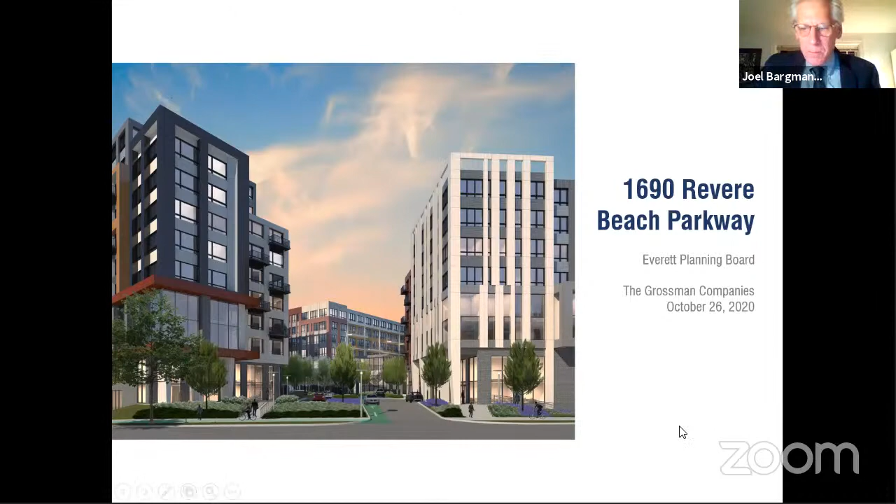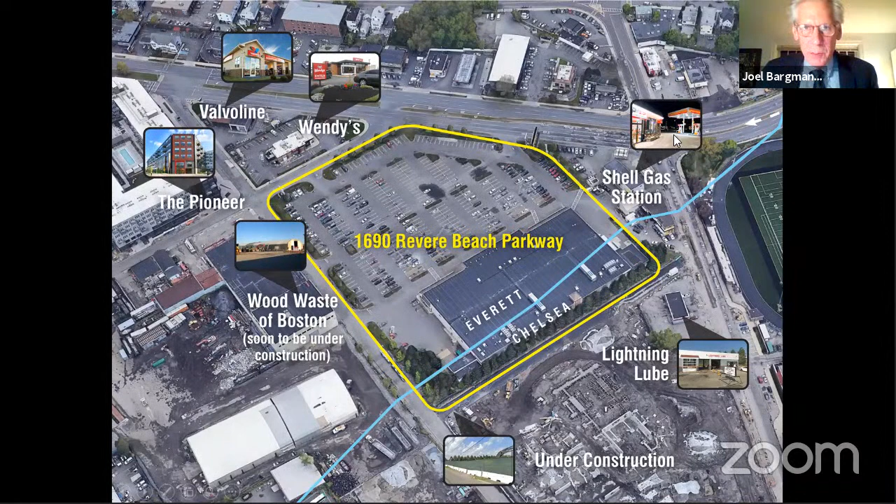As you recall, the site is the site of the Stop and Shop, bordered by the gas station on Everett and Revere Beach Parkway, Revere Beach Parkway on one side of the site, Boston Street, Vale Street, and then Locust is the street between this project, 1690, and the Fairfield project that's completing construction now to the south.

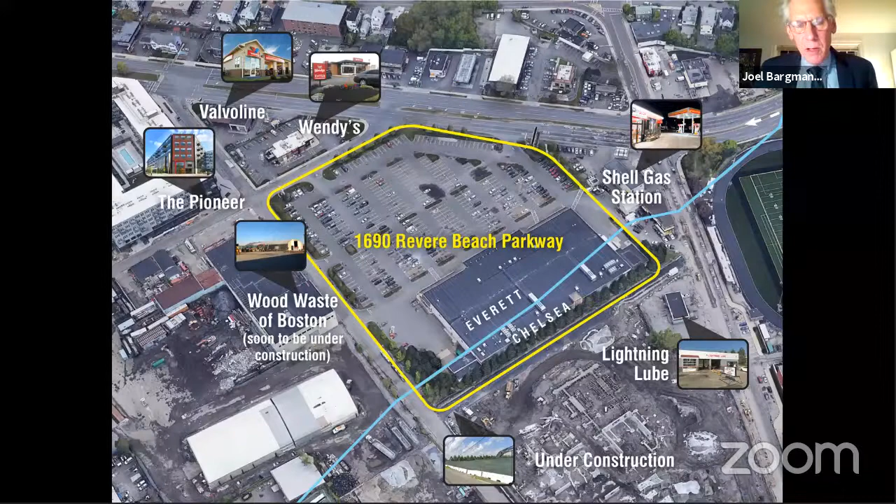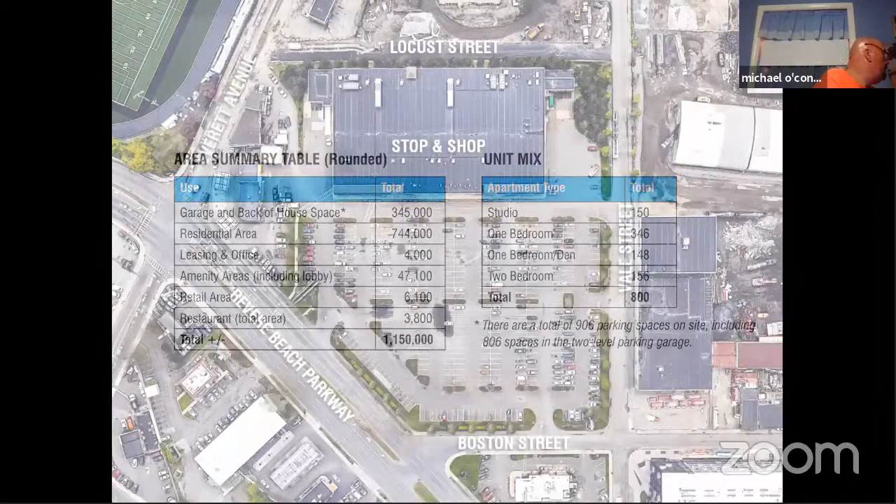As I mentioned, the statistics have not changed for the project. This is just a site plan to orient you with the plans that have been prepared. So Everett Avenue is on the left, Revere Beach Parkway is on the diagonal right-hand side.

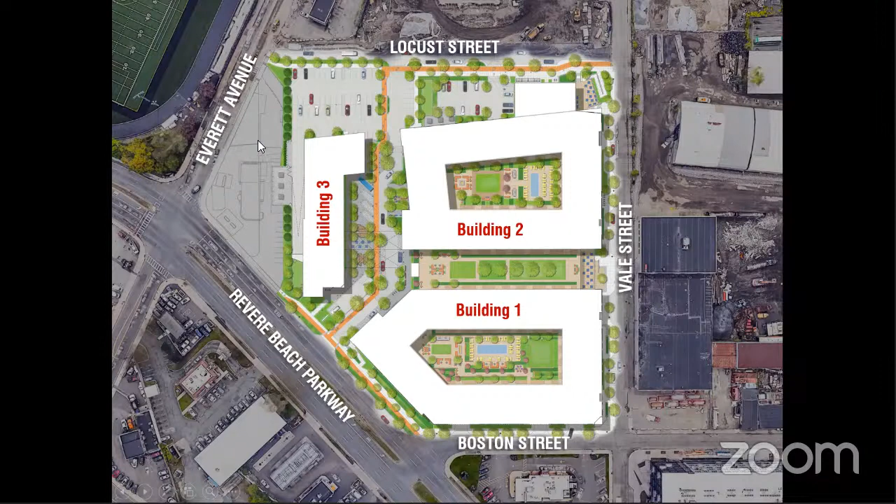And this is our site plan, which you had seen, with 3 buildings: building 1 on Revere Beach Parkway and Boston Street, building 2 on Vale Street and Locust, and then building 3 abuts the Shell oil station and the auto service facilities on the left side of the site, and Locust Street on the top side of the site. So there are 3 buildings, and the 3 buildings form a common outdoor space.

We call it a smart street — other terms are used for it — but it involves pedestrians, automobiles, public safety vehicles. We'll show you how those can access it, and it includes a bike path, which is the orange line connecting Revere Beach Parkway through this smart street area, the courtyard, onto Locust Street, and then to Vale.

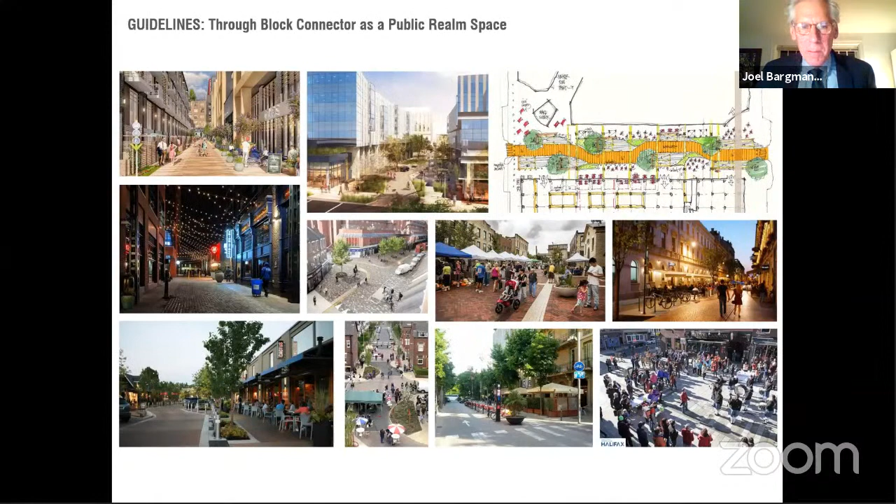These are some pictures that show you what these woonerf-type streets, these mixed-use type streets, can offer. It's a very pedestrian-oriented and consciously vehicle-slowed space, sort of organizing the 3 buildings.

So I mentioned we'll go through the guidelines. The first thing we've done is submit a context map, which wasn't in our initial submission. It shows the important facilities around the site, and more specifically sets us up for how the building responds to the context of the particular site. As you know, the site is undeveloped for the most part, other than Pioneer, the Wendy's, the Valvoline shop, and the Shell shop, with the new apartments coming up behind it.

The context of the site is also pedestrian and vehicular oriented. You'll see how we're making some very conscious connections on the site involving vehicular, bicycle circulation to connect Vale Street and Revere Beach Parkway in an interesting and cumulative manner that reinforces pedestrian, bike, and automobile traffic.

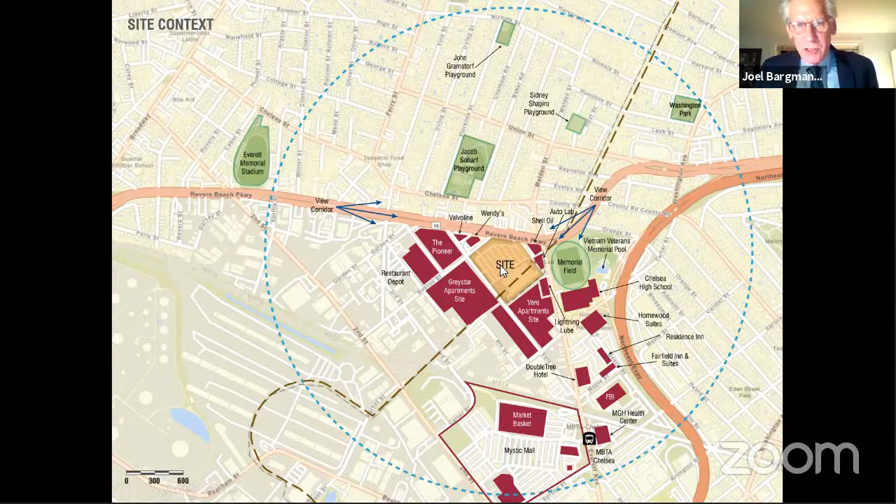What that connection shows, going back to the site plan, is a very direct access from this side of the building to Vale, to the commuter rail. There also happen to be two other lobbies for building 1 and 2, which is another design criteria - buildings discharging into Vale Street and then connecting to the commuter rail in the simplest manner.

The other through-block connection connects Vale Street on the podium level with two stairs linking street level to the podium level, going across the site. This is not only for light and air for the buildings, but creates another pedestrian connection from the building to Vale Street to the commuter rail. So for context B1, we think the site plan has addressed the context issue in a clear and exciting way.

Additionally, the context asks us to address specific accentuated corners, which I'll show in the perspectives I had shown previously. We've accentuated the corner of Vale and Boston, Locust and Vale, Revere Beach Parkway, and created a center section on Vale Street intended to break up its length and create a crosswalk connecting to the new Wood Waste development that Greystar is involved with. So there's a connection across Vale Street and a connection up Vale Street.

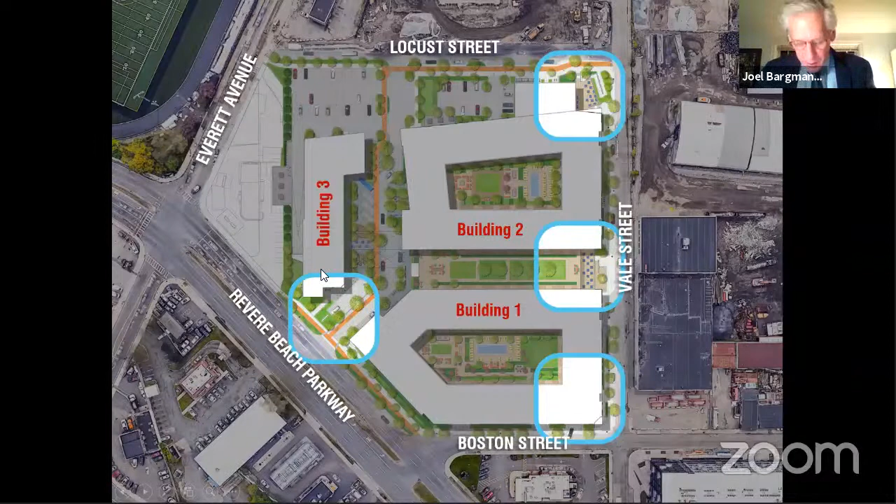There is a blue bike, 15 bike rack there for rental blue bikes. Inside the building, we have parking facilities located right in the front. It's as easy to get into the parking facilities as it is to get into the garage for cars. And we have the requisite number of bike facilities on the site.

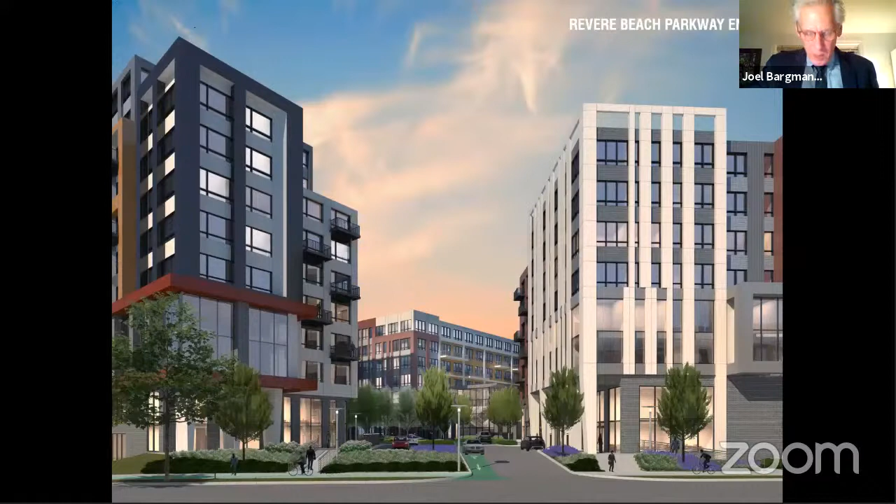Programmatically, I'm now in section C1. It is a residential property. Residential is encouraged in section C1 as a balance of use, residential mixed use.

This is the entry, with building 1 on the right, building 3 on the left, and building 2 straight down, with the private street, courtyard, drop-off area, and more private areas within the space.

You'll see that ground floors of the buildings comply with section C2, which asks the architect to enliven the public realm, create interesting pedestrian journeys, ensure privacy for residential uses, and screen service areas from public streets and parks. You'll see more in my further direction about materials and where gas meters may go to be hidden from the street side of the site as well.

The primary entry to the site is right here, building 1, right here, building 3, and then right there, building 2. So granted, the main entry to building 2 is not on Revere Beach Parkway, but it's visible from and very strongly related to the parkway. Building 1 and 3 have strong entries. Both building 2 and building 1 have major secondary lobbies on Vale Street, which is the public street. So we believe our property complies with C2.

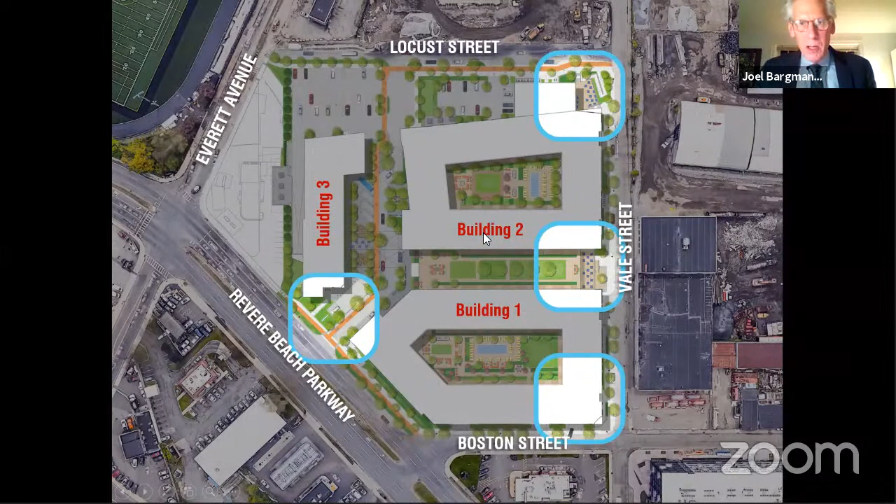Between our outdoor amenity space on the courtyard and 15,000 square feet of indoor amenity space, we have more than 3 times the required amenity space for the guidelines, and that's consistent with building 2 and building 3. All of them will meet that minimum of 25 square feet per dwelling unit, by far in excess.

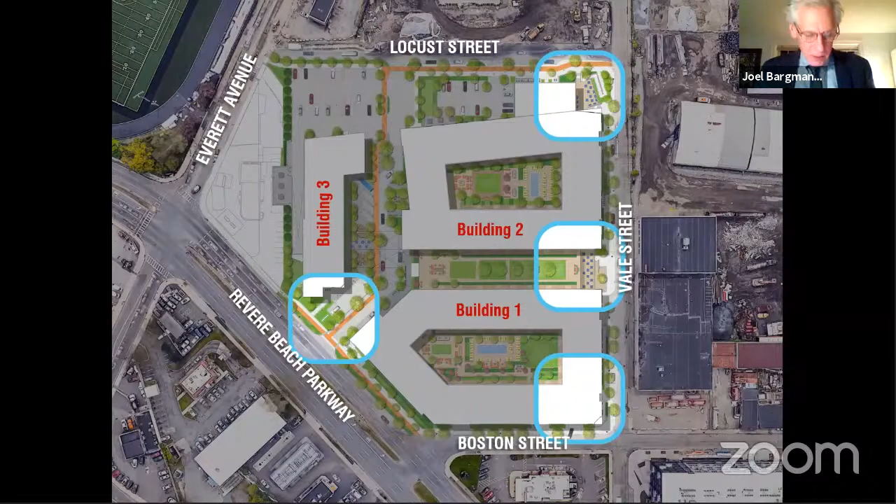The roofs of the buildings, you can see the buildings are of different heights. The building edges are articulated; even building 2 and building 1 have some different heights to them, which is again a requirement of the guidelines. Parts of the roof are flat because we do have roof decks on the roof, and we have the opportunity to put solar collectors on the site.

The last item reflects a question asked at our first review: what are our materials in detail? One question was whether the materials are more clearly expressed on the perspectives than on the elevation sheets, and the answer was perspectives.

So we've taken the liberty of highlighting, at each corner of the building, what material is used where. We have brick at the base of the building, and metal and fiber cement panels at the upper portions. This is a relatively high density fiber cement that looks like a metal panel. It's a very nice product.

The panel on the left shows brick type 1, the base building brick. Brick type 2 is used on the commercial entries, the two restaurants, trying to bring an industrial character to those facilities. And then we have color panels of the cement panels and the metal panels.

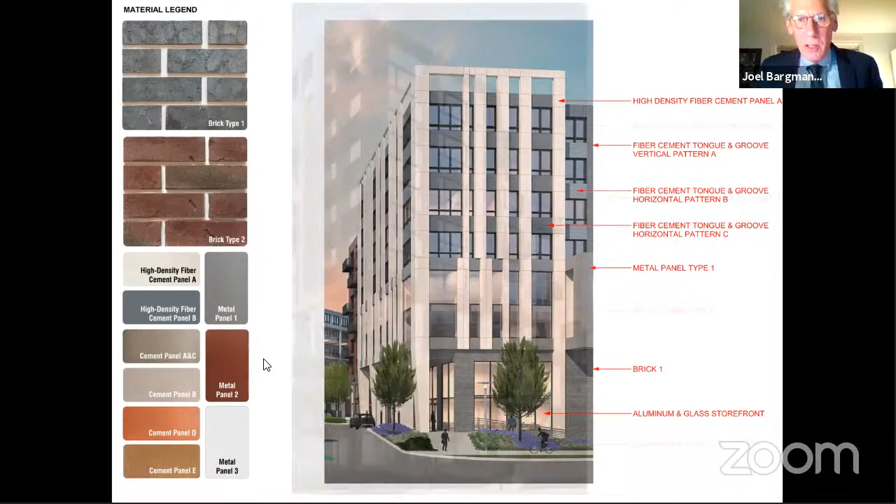This is the corner of building 1, the two main facades. Again you have brick at the base, cement panel and metal panel going up, and high density cement panel as you get to the top of the building.

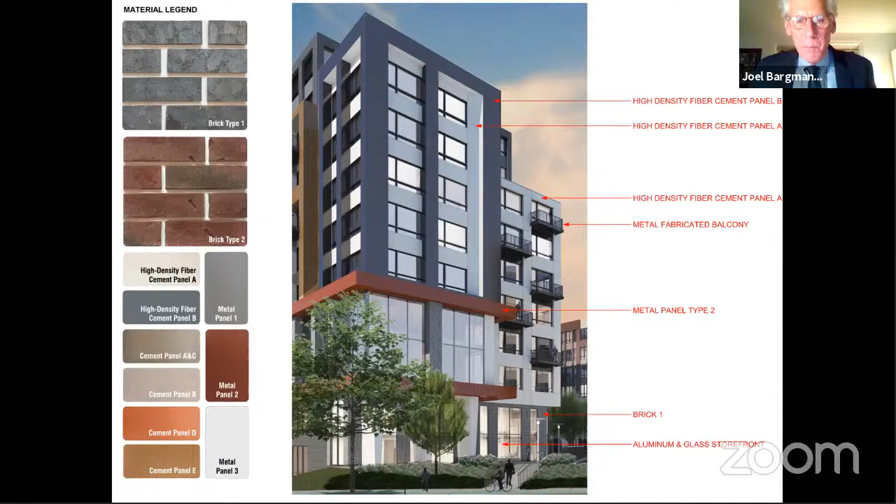I'll show a rendering. We've quantified that the base of the buildings, as they face Revere Beach Parkway, have 20% of the opaque surface area in brick. We've carried that brick on Vale Street and Locust Street and through the common courtyard street, so the podium levels are articulated via the brick material running through.

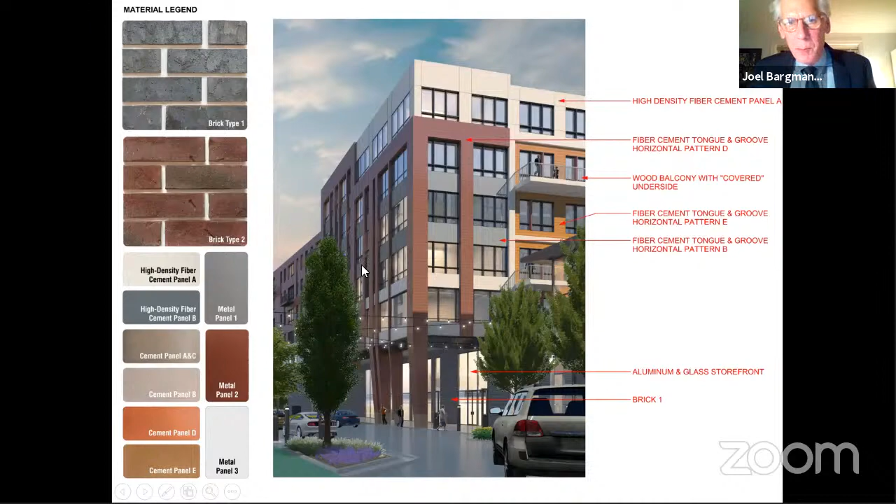Here is the middle of the street, treated a little differently than building 1, giving a sense of variety between the buildings with more fiber cement. There's the entry to building 2, aluminum glass storefront, similar to brick number 1. The gray brick is still carried through on the base, but the upper portions differ quite a bit from building 1. This is looking from the main courtyard out to the street.

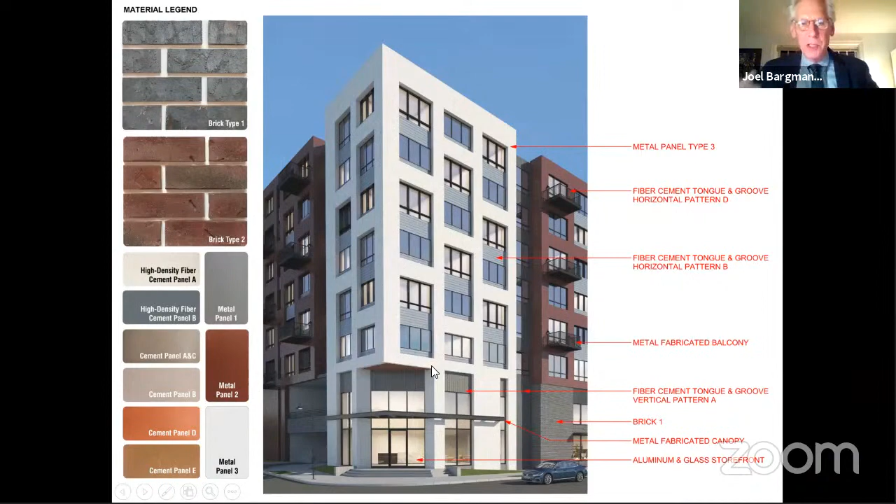Again you can see the variety in the buildings. Here you have the accentuated corners at Boston and Vale, and the accentuated corner in the middle of our site connecting to the Greystar development. It's a similar metal and high density fiber cement, in different colors, broken up in increments of 60 feet or less. For the most part it's brick, but at these accentuated corners the surface material comes down to create a break in the building.

What you see here is the connector that goes from Vale Street to the courtyard - the east-west horizontal connector that connects to the north-south private street courtyard.

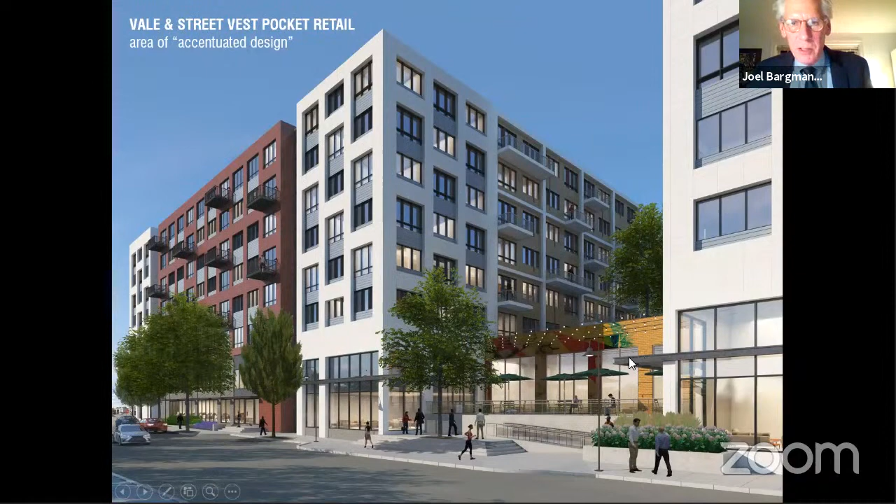Here is one of the two recessed restaurant zones between our buildings, using the red brick I mentioned. It's not quite showing up on the rendering as it should, but these restaurants are intended to be more industrial oriented, beginning to make the connection between the new and the interior of the site.

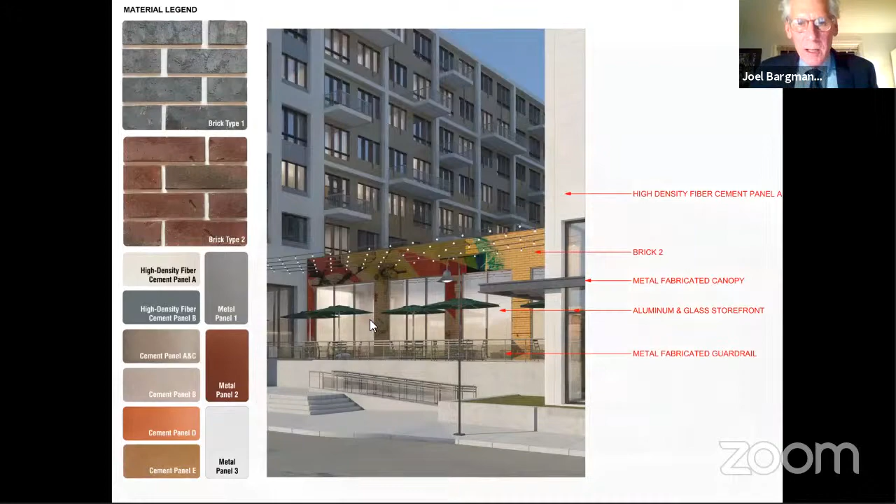We make that connection even more pronounced on this end of the building, where we have a neo-industrial pavilion - either a brew pub, food court, or food truck, to be determined - clad in metal and brick, using that red brick color as well as at this corner of the building. So as you reach this far corner and connect deeper into the site, there's a bit more of the red brick coloration.

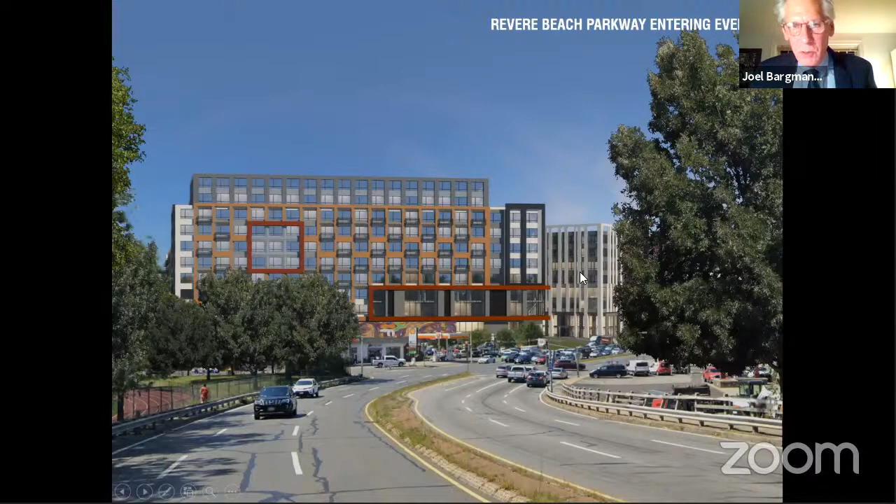And then the Keystone site view coming down Revere Beach Parkway - you have the Shell station, Building 3 fronting across that site, and Building 1 in the distance. This shows the facade treatment.

The requirement on Revere Beach Parkway is to have 20% of the facade brick clad, and we have 24% on Building 3, actually 35% in the opaque area as it faces the other corner. Revere Beach Parkway comes around at an angle, so it actually fronts on this facade and on this facade.

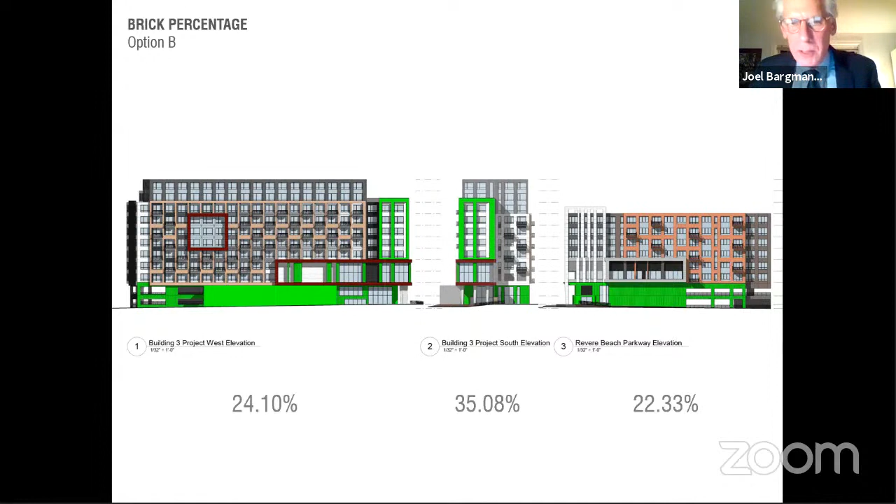So we felt both of those should honor the design guidelines. This facade is actually partly on Boston Street, but again, this piece is visible from Revere Beach Parkway. I do have this slide up because the current plan of the building is to do heating and cooling via a heat pump system, which would be an electric system. But should the pricing turn out to be disadvantageous, or should the utilities not be able to provide sufficient electrical service for the heat pumps, we may go into a gas system, and this brick wall would be concealing the gas meters, which need to be on the street side of the building and accessible to the utility without going into the property. So the brick is handling two things there.

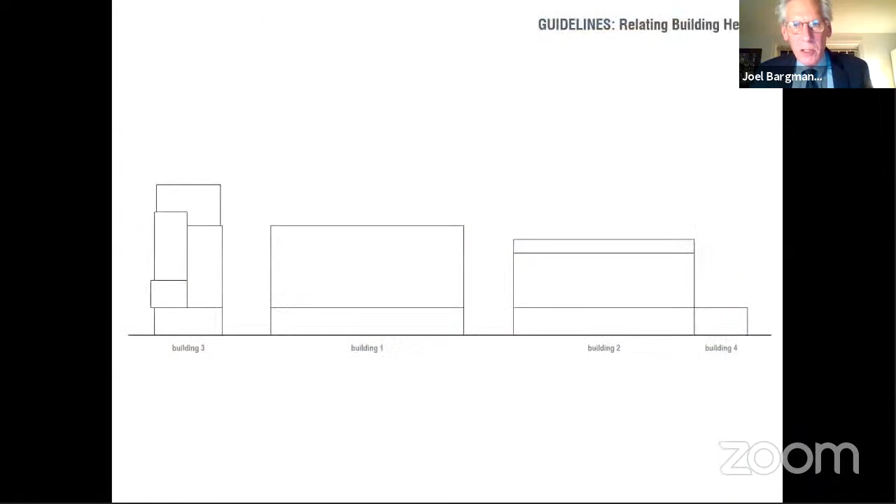So that's the overview of the architectural portion. I want to quickly jump to, just have to screen share here once. All right, so we have the full encyclopedia of drawings tonight, so we can show you anything that a question might arise. So as I jump between disciplines, just excuse me, I have to go through about 150 drawings to get the right one.

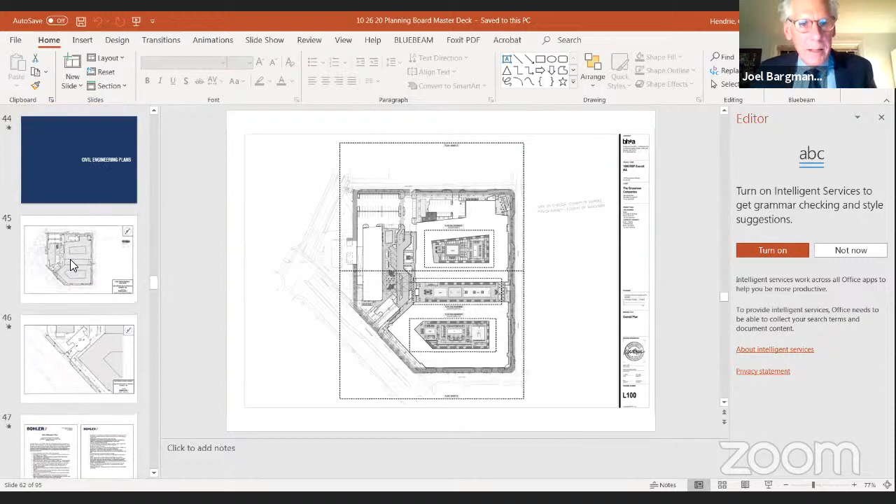The other thing that we've done in response to requests from the planning board is we've resubmitted all of the landscape drawings, thanks to Brown and Sardina, without the background. So you have a new set of drawings where the existing conditions are not showing through underneath. And that was the only two questions that came up with the site. Thank you for your patience on that.

I'd like to turn it over to Steve Maturano from Bohler Engineering to address a few of the civil engineering pieces. And just before I do that, I left out one key element. We did mention it last time. I want to reiterate the underside of balconies that you saw on those perspectives would be enclosed. You would not see the underside of the balconies the way was asked about at the last meeting.

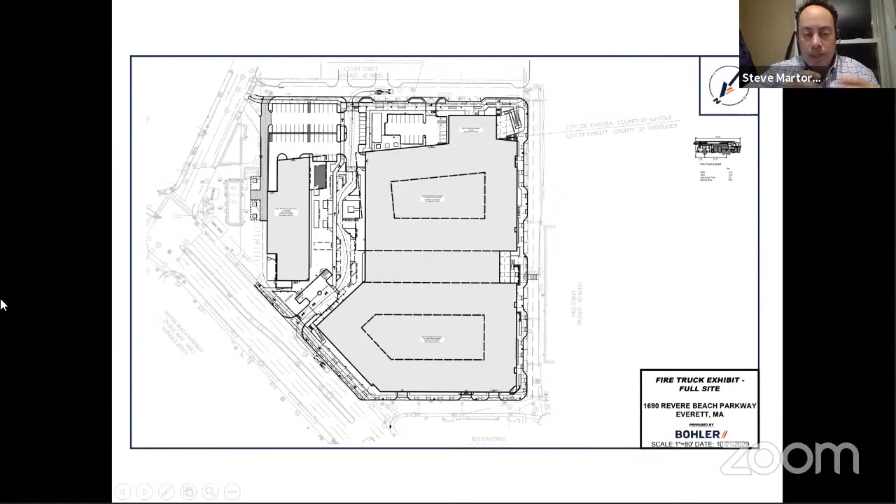If you want to go to the next slide, we zoom in a little bit on that front entrance. We've heard a couple of times an interest to get maybe some wider radii coming off of Route 16. So we've now widened those out to a 25-foot radius, which is a pretty comfortable turn, and obviously accommodates the fire truck, which is probably the most critical move to make sure we accommodate. So obviously it accommodates passenger vehicles. A little more comfortable. I think we were showing somewhere in the range of a 20-foot radius before. So we've increased the radii both coming in and out, which effectively widens that entrance at the street and should allow folks to come in a little easier off of Route 16. Again, we are trying to implement some traffic calming measures.

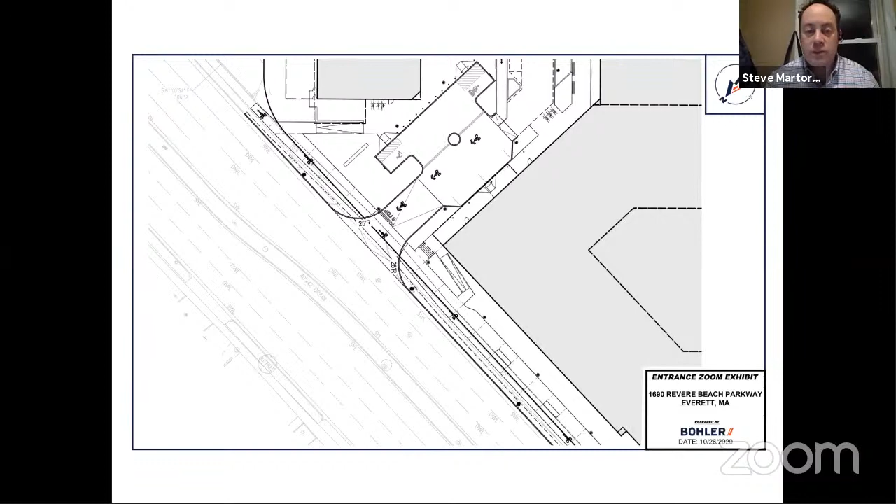So we don't want it to be a full slip lane that would allow people to come in at a high rate of speed, but we also don't want them coming to a complete stop. This feels like the right balance, getting folks in a little quicker than what we had initially proposed, but still trying to get them to slow down as they come into the site.

Obviously as the design and the buildings get further developed and we get a general contractor on board, they need to add detail to this. So this is like a blueprint of general contractor information that needs to be provided to the building inspector, some prior to building permit, and some between building permit and start of construction. It's a very comprehensive list.

It includes a couple items we've heard from the board. There's a commitment in here to detail any pedestrian closures, and commitments to make sure Vale Street is passable by pedestrians throughout construction. The building inspector will have review of any closures of sidewalks, and there will need to be a comparable pedestrian path provided if and when portions of sidewalk are closed for construction purposes.

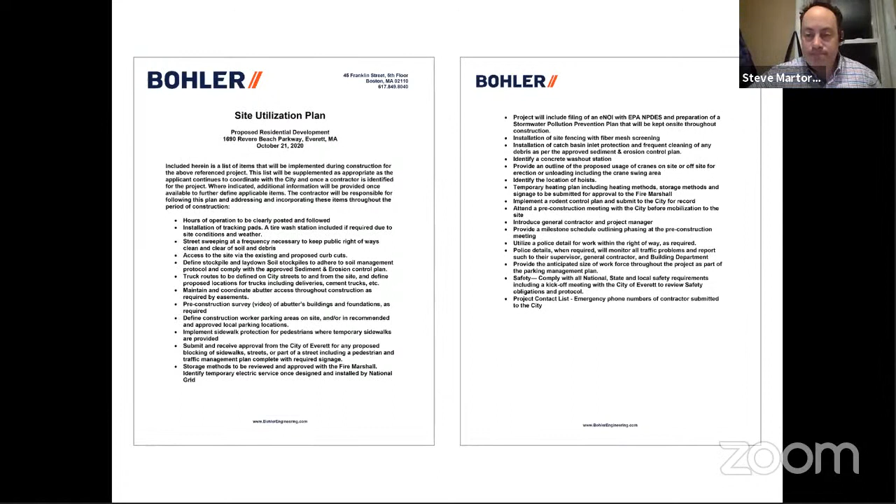Hey, great, thank you Steve. I think the byword is comprehensive, and thank you also Joel for that review.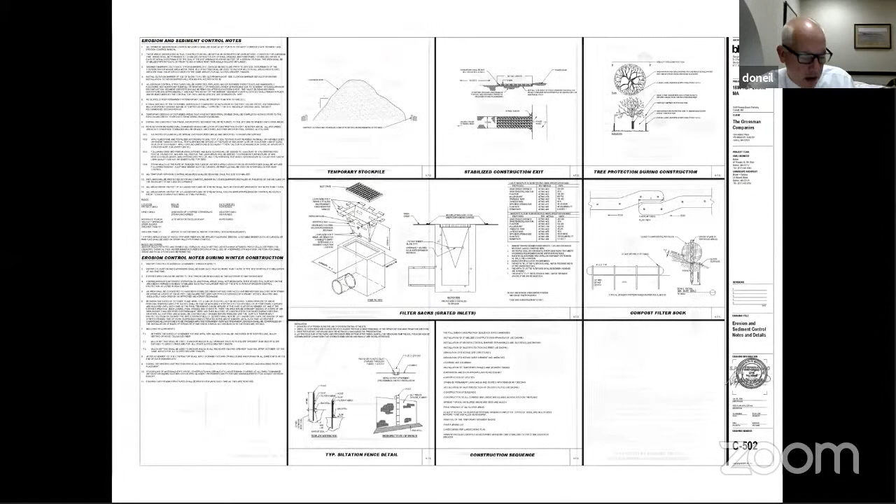So continuing on in our agenda for the evening, Sean Kelly is on the call, our transportation consultant from Vanasse Associates, and hopefully Sean can respond to some of the questions that have come up from the board in prior meetings.

Following my agenda, I'm looking to hear from Lynn Sweet, our affordable housing consultant. Lynn went into some detail at our last meeting about the plan, the numbers, and the unit dispersion throughout the planned layout of the units. I believe she's with us tonight, and I want to give her an opportunity to fill in anything that might have come to mind, and give the board a chance to ask questions, having had the chance to hear her presentation last time and see the materials in detail that were submitted.

So Lynn, are you available for a quick overview? Did I not see her? Hey Lynn, you're muted.

Hey Lynn? Yeah, sorry, just having technical difficulties. How's everyone doing? Good, thanks. Great, thanks, good to see you.

I did go through the presentation slide by slide last time. Honestly, the only thing that's changed is that I fixed an addition error on the rents, so I'm not really going to go through it again. I don't have a lot to add from what we went through last time, but I'm certainly happy to answer any questions anyone has on this subject matter.